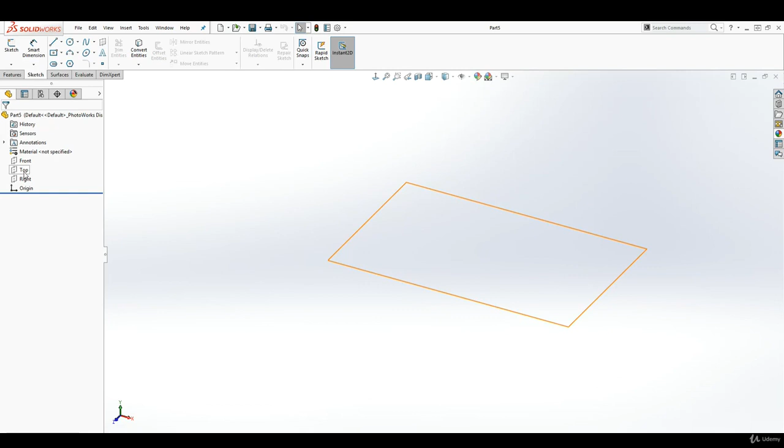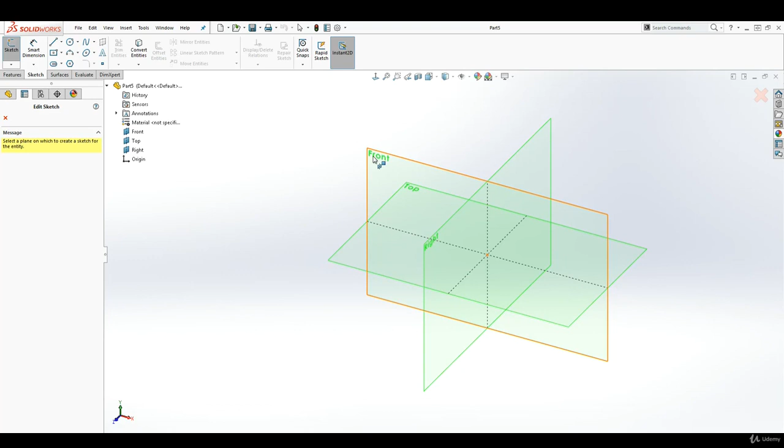You can select your front plane and click sketch to start your sketch. Or if I click on sketch first, SolidWorks tells me to please select the plane on which to create the sketch. So I can select the front plane, the top plane, or the right plane on this screen, or click on this drop down to see the same options. I'll select the front plane, and now I'm in sketch mode.

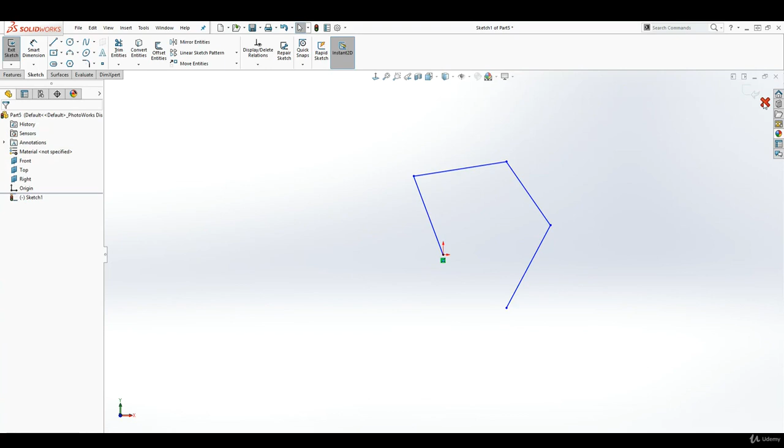You can tell you're in sketch mode because you'll see an exit sketch sign, done sketch and exit sketch options, and this red gizmo. Once we're in sketch mode, we can just start drawing something. That's how you select a plane to sketch on. I'll exit out of that sketch without saving it. So now that is your sketch plane and how you draw on the sketch.

SolidWorks also gives you the option to create a sketch plane. To create another plane in addition to these, we'll go into features, select reference geometry, and select planes. Now it's asking for the first reference plane to constrain the new plane on, because you have to tell it where you want to create that plane. Let's select our front plane from this drop down.

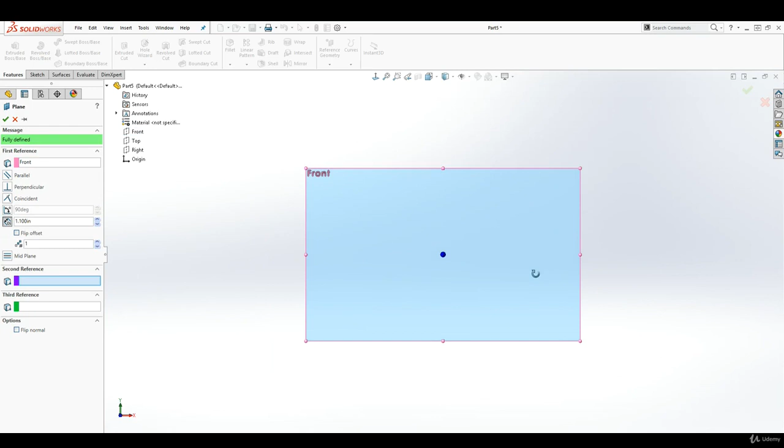By default SolidWorks makes the new plane parallel to the first plane you select. So now we're telling SolidWorks this plane is 1.1 distance from the front plane. We can increase or decrease this number and the plane goes back and forth. We can also offset it to the other side, and as we increase and decrease the number, the plane moves back and forth.

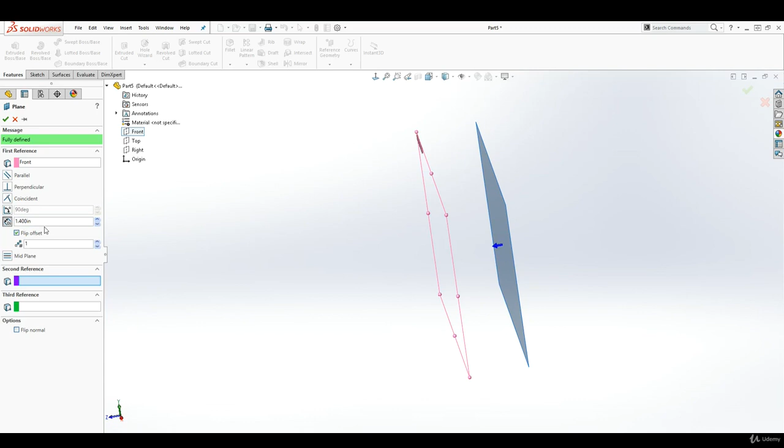Another thing we can do is add as many planes as we want. Let's say we want 6 planes, 1.5 apart from each other. We can select that and click OK. That is how you add planes.

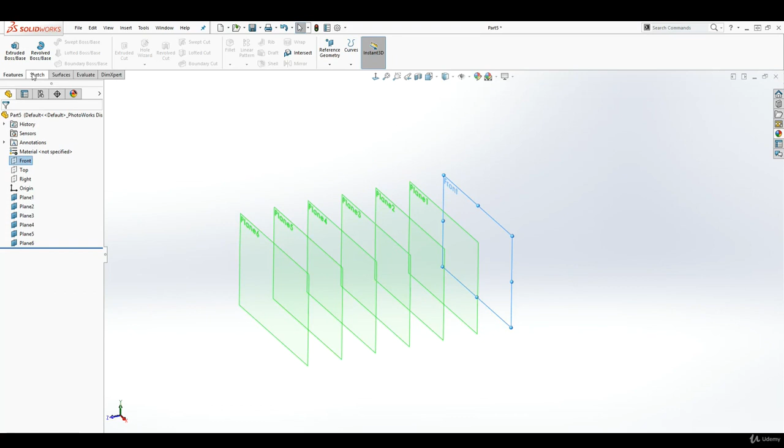Another way you can add a plane is by creating a sketch. Let's say I go on my front plane, go to sketch mode, and draw a midpoint line on this front plane, then exit that sketch. So now I have that sketch on the front plane.

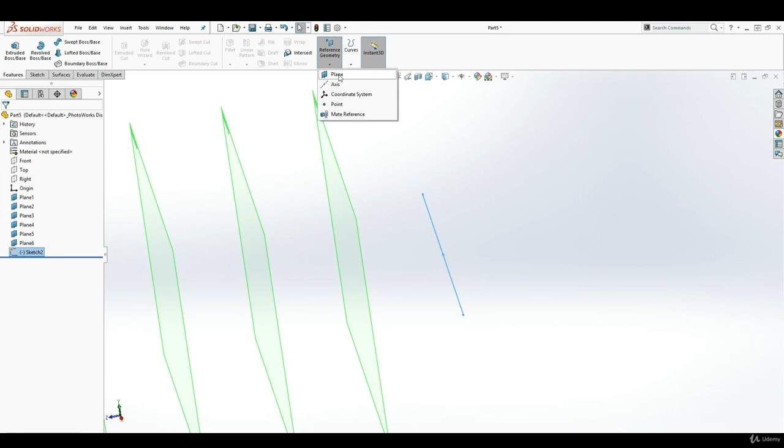I can go back and make another plane, selecting my reference plane, which is the front plane. SolidWorks wants to put it parallel by default, but I want to do a perpendicular plane instead. The yellow highlight shows that is my first constraint. I want this new plane to be perpendicular to the front plane, so I have to select the second reference, which is that line.

SolidWorks has created a plane that is perpendicular to that line. If I click OK, we have our new plane, perpendicular to the front plane.

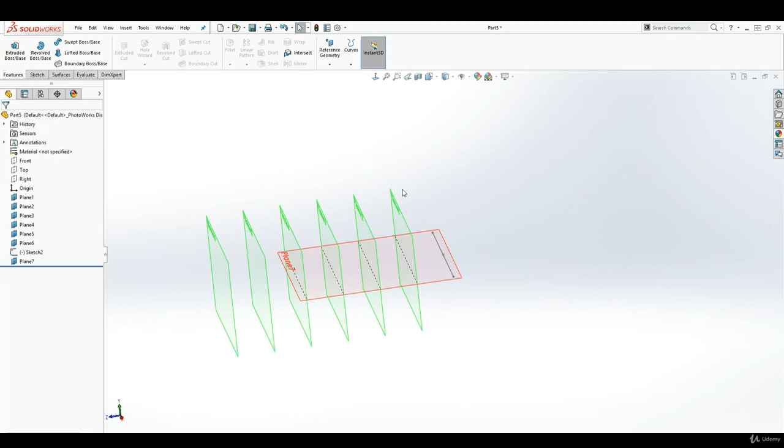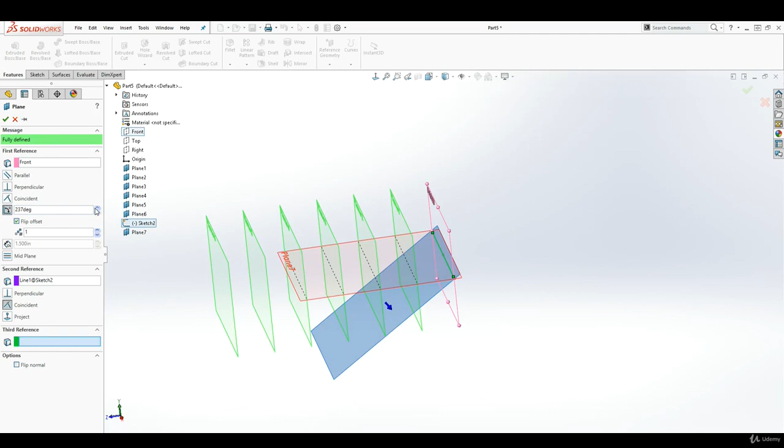I can draw another plane. We'll go to reference geometry, plane, and do the same thing on the front plane, selecting perpendicular and then my second reference, that line. This time I want it angled, so I can change the angle on that plane. If I flip it, it goes back in the other direction, and you can change the angle on the plane. That is how you add an angled plane, and we click OK.

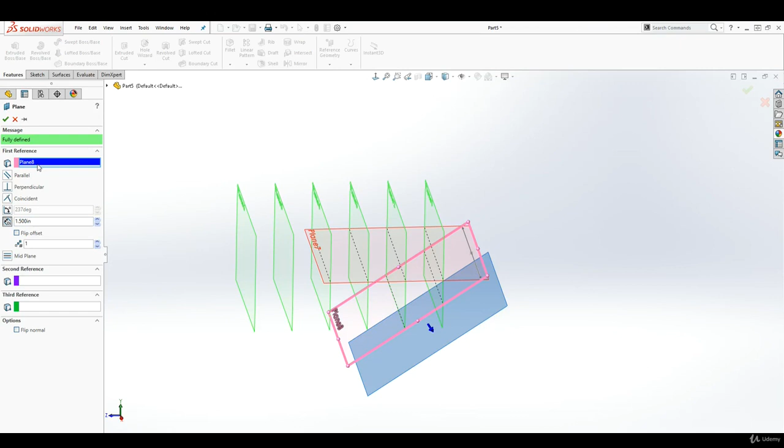The last example we're going to cover is the mid-plane. Now I have these two planes here, and let's say I want to draw a new plane in between them. We go back to the feature tab, reference geometry, plane — it seems my plane was selected prior, so let me exit out and make sure I'm not selecting anything, then go back into reference geometry plane.

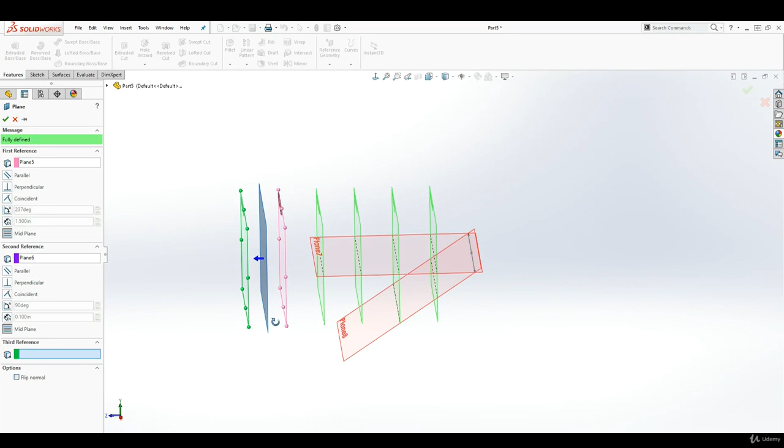I want to put a plane between these two planes, so I'll select this plane as my first plane, and set this number to 0 for now. Actually, even without doing that, I can just select the mid plane option. Now it's asking for my second reference, so I'll select this other plane, and as you can see, there's a new plane created in between. Click OK. That is the plane feature in SolidWorks, how you sketch on a plane and how you make new planes.